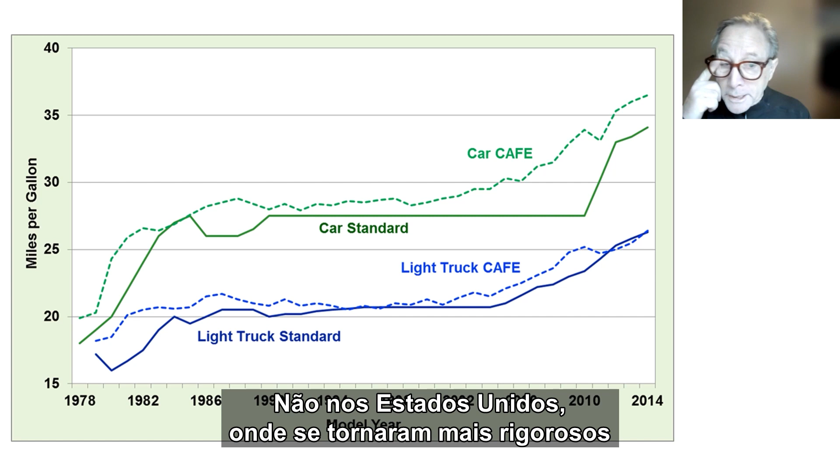In some places, it was the beginning of the bicycle revolution. Not in the United States, where they basically started tightening car regulations and car fuel consumption, beginning of tighter building codes and reducing demand for fuel.

Then supply-sider Ronald Reagan came along, smiled, cut a deal with the Saudis, and everybody started pumping again, and life was fine. Fracking made the energy problem better, but it made the carbon problem worse.

Energy conservation and efficiency became a hard sell when you had all kinds of new sources of gas, from the oil sands to the North Sea to deep sea drilling to Alaska pipelines. It was all about supply.

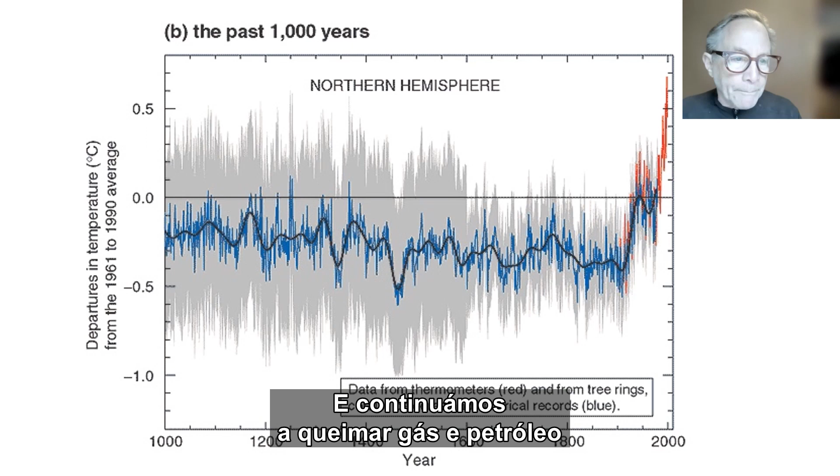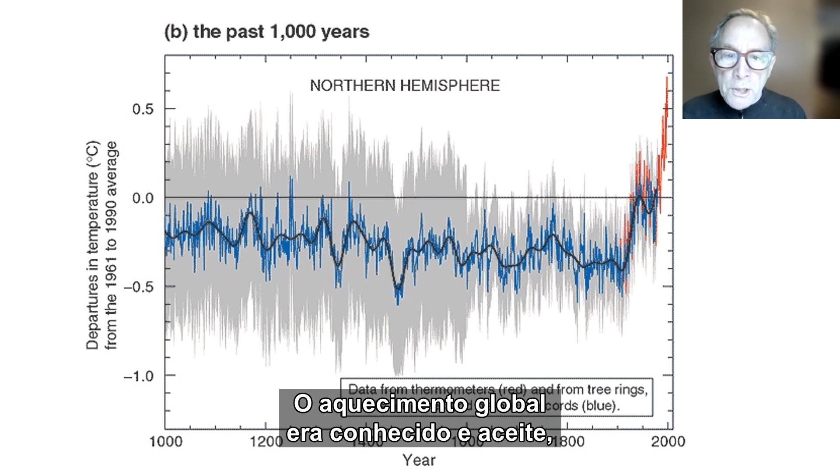And we kept burning more gas and oil, and the temperature kept rising. Solving the energy problem didn't do anything for the carbon problem. Global warming was common knowledge and accepted, but everybody was having such a good time burning all that oil and gas and didn't take it very seriously. And of course, it was all very political.

The Paris Agreement, after years of talk, finally set some limits on carbon emissions with a schedule, a carbon budget, and a target, a limit on warming to avoid catastrophe.

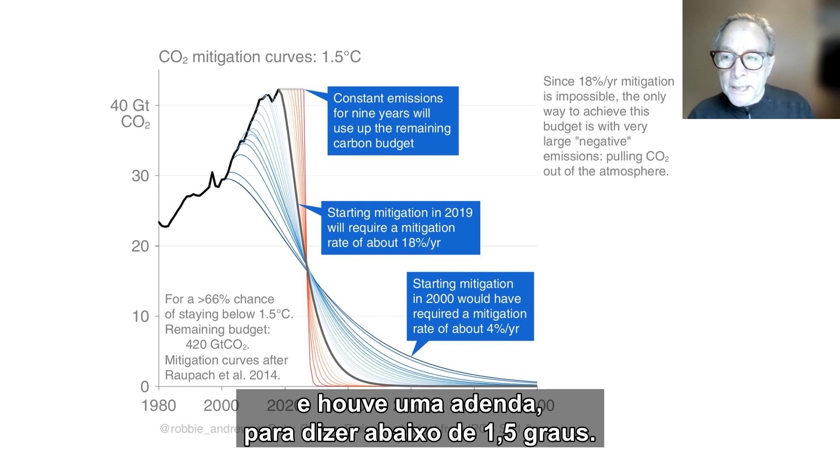According to the IPCC in 2015, they wanted to keep the temperature rise to 2 degrees. But in 2018, they figured that 2 degrees might be catastrophic, and there was an addendum to say below 1.5 degrees. And there's no ramp in reductions here. It's really a cliff. When this graph was done, the total remaining budget was only 420 gigatons.

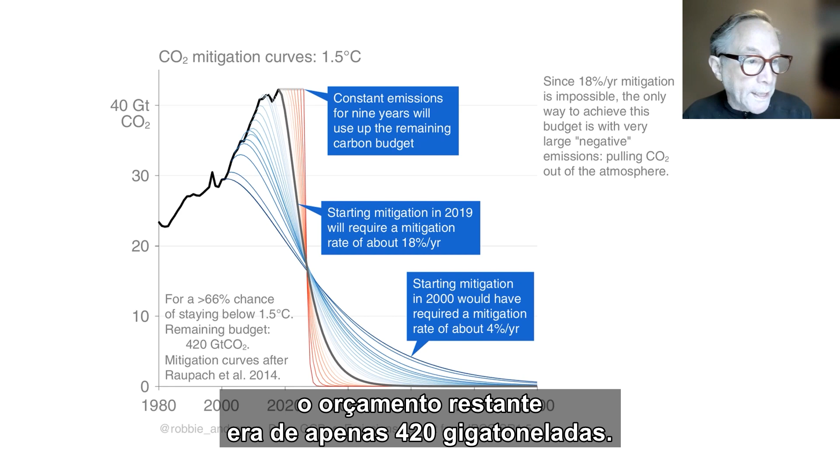And with all the talk and all the agreements and everything else, emissions kept rising, except for that little dip in the pandemic, and it's now rising again. And some have already given up altogether and have basically said we can't be saved, 1.5 degrees is out of reach.

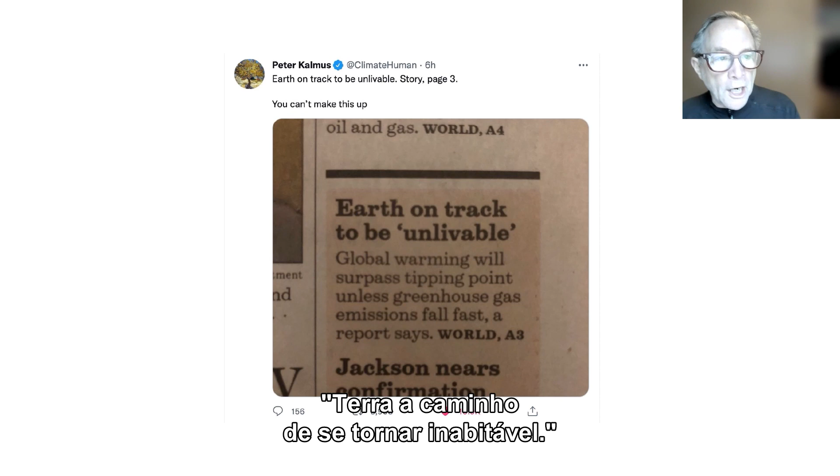Others don't. Last April, there was the third climate change report, the third section, I should say, that basically said what we have to do to mitigate climate change. And nobody paid attention to this. This thing dropped like a brick. You got things like this: Earth on track to be unlivable. Story on page 3. Didn't even make the front pages.

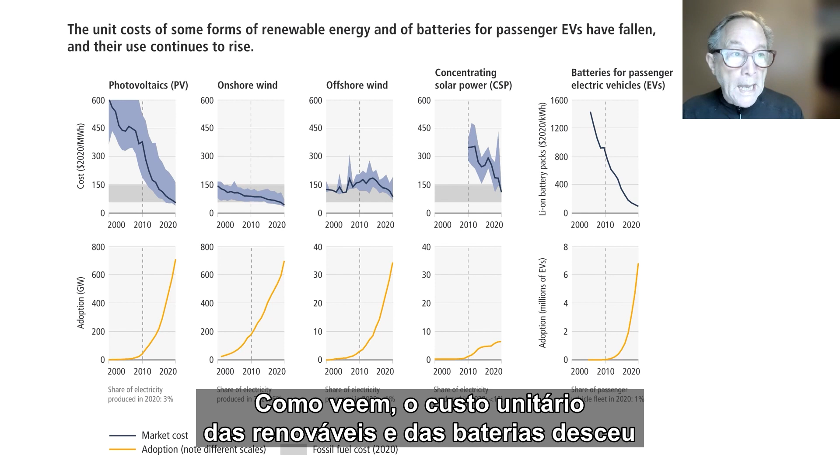But the content of it was in fact extremely positive. As you can see here, the unit costs of renewables and batteries have dropped and their use has dramatically increased. Renewables for 2021 dominate the additions to power.

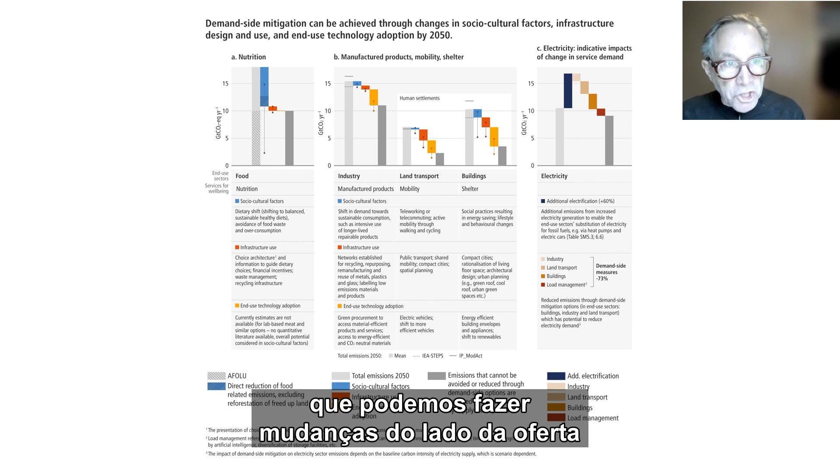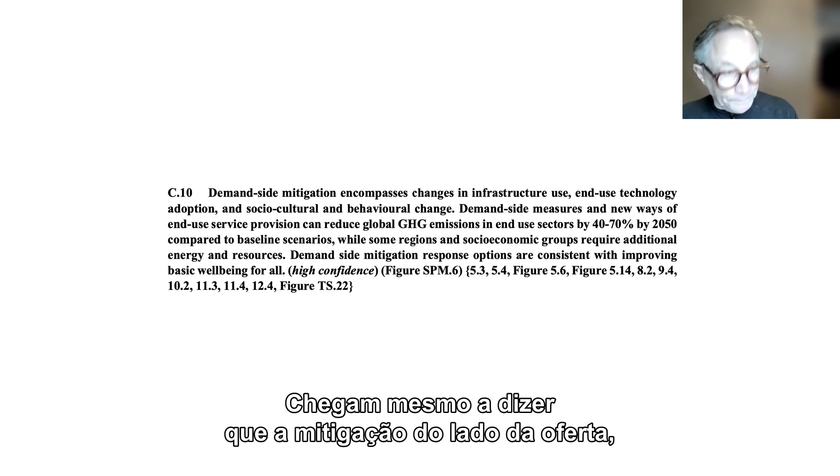And the IPCC report set out the fact that we could make changes, demand-side changes, to reduce our carbon emissions significantly in industry, in transportation, and buildings. They went so far as to say that demand-side mitigation, changes in infrastructure, technology, and behavior could reduce global greenhouse gas emissions by 40 to 70% by 2050.

As Amy Westervelt, a journalist, wrote it, the report made one thing abundantly clear: the technologies and the policies necessary to adequately address climate change exist, and the only real obstacles are politics and fossil fuel interests.

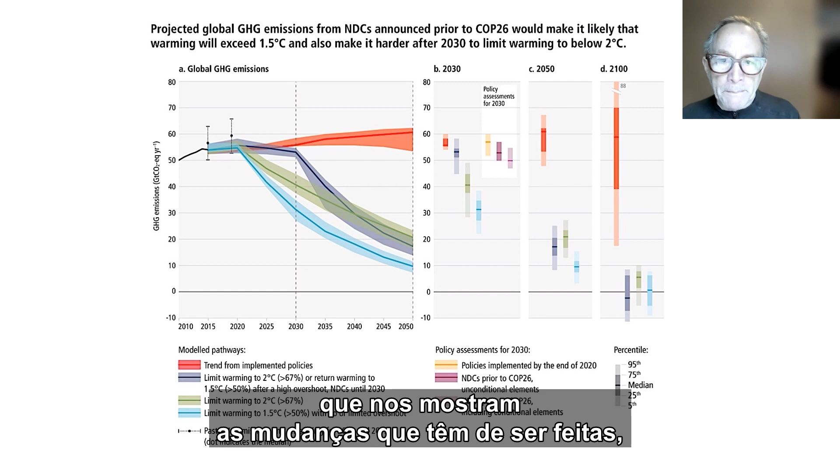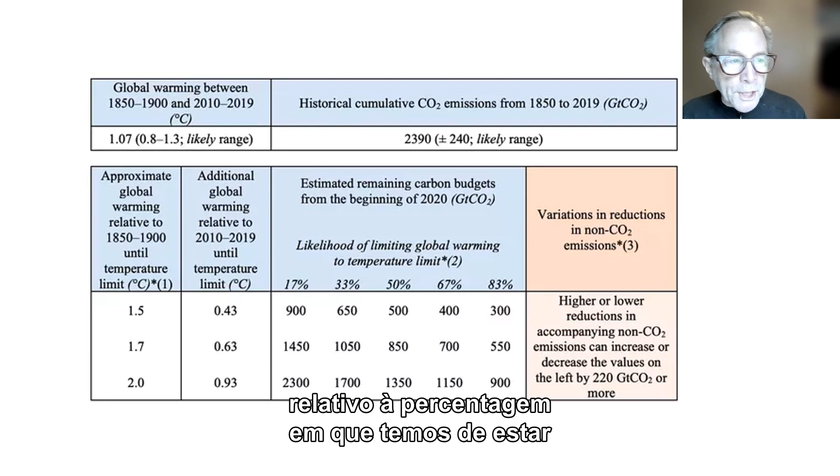So everybody keeps showing these graphs, these slopes of changes that have to be made, as we have to drop by. But in fact, it's much simpler than that. There's a ceiling, a budget, a number that they determined through their calculations, with what percentage do we have to stay under a certain temperature.

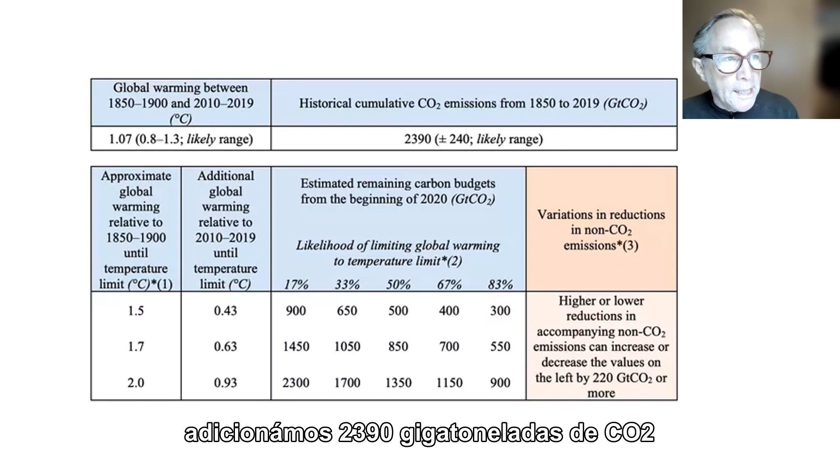So from 1850 until now, we've added 2,390 gigatons of CO2, and this is what we have left to stay under: 1.5 degrees at a 50% chance gives 500 gigatons, 2 degrees gives 1350. If we want bigger chances, it's a smaller number.

And here we are again. The last time the tanks were rolling through the desert, now they're rolling through the streets of Ukraine. And we've got a gas crisis.

They spent all this money to build this big pipe from Russia to Germany, and then they blew it up. So now we're in a situation where you can't get gas to Europe from Russia very easily, which has immediately caused huge problems of inflation in the UK, problems of supply that Germany is approving limits on heating and turning out the lights at night.

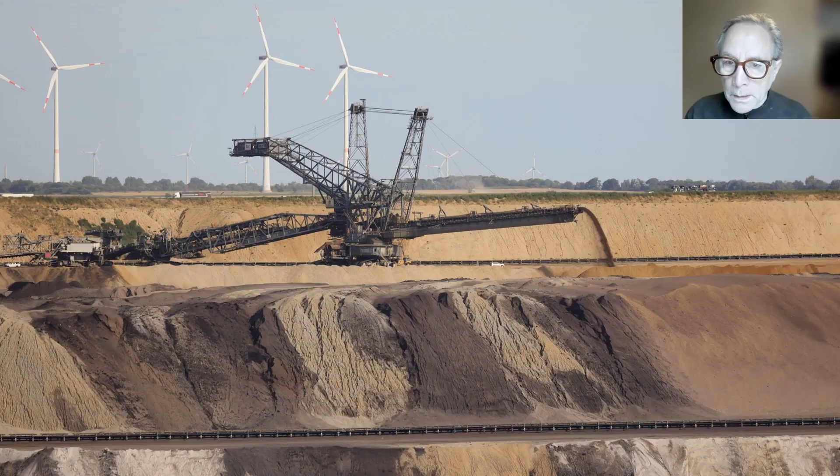And Portugal's inflation was the fastest rise in 30 years. Many people worry that carbon emissions will spike even higher because countries like Germany are digging more coal and opening coal plants, and Britain is looking at fracking.

Liquefied natural gas is being shipped in, and it has a much higher carbon footprint than regular natural gas, simply because of the refrigeration and the transport. Other people think that what will happen is another thing that happened in 1974.

As Michael Liebreich says, we're going to have the great clean energy acceleration. From now on, all three elements of the energy trilemma — security, affordability, and sustainability — are pushing in the same direction. The great energy price spike is going to give way to the great clean energy acceleration.

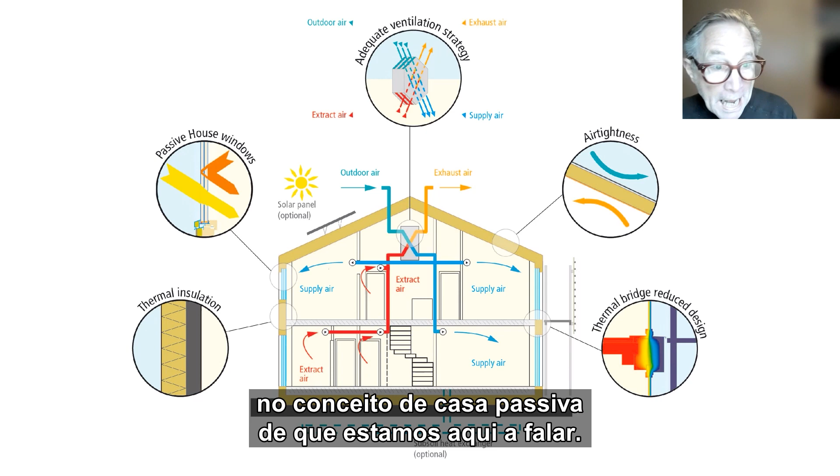Fatih Birol, head of the International Energy Agency, says the same thing: after winter comes spring. The oil shocks of the 1970s resulted in major progress in energy efficiency, nuclear power, solar, and wind. Today's crisis can have a similar impact and help speed up the shift to a cleaner and more secure energy future.

And energy efficiency is, of course, the key point in the Passivhaus concept that we're all here about. And the Passivhaus people make it very clear: energy efficiency is the first renewable energy.

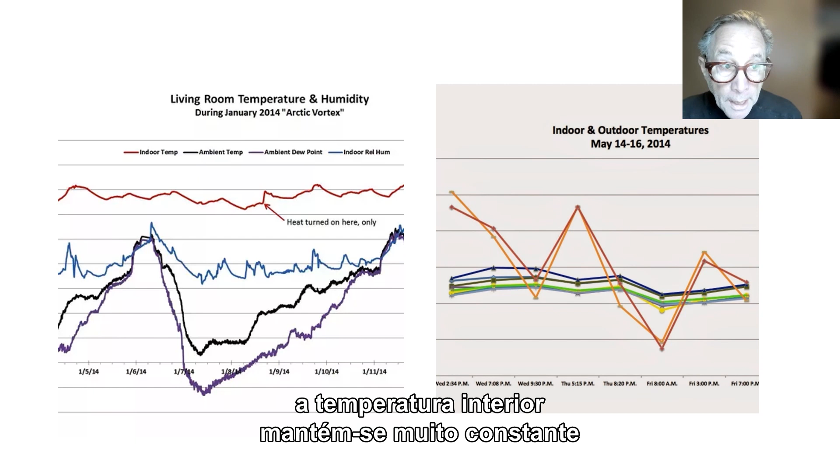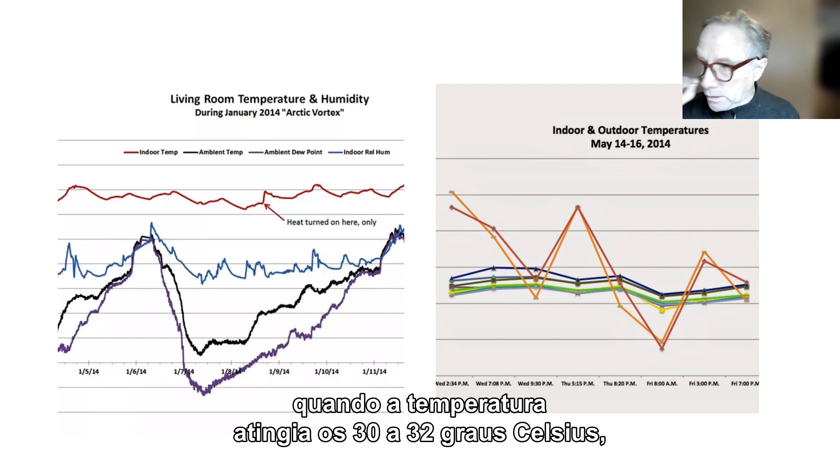And in California in 2014, going the other direction, where the temperature was getting up to 32 degrees Celsius, the temperature inside stayed cooler.

They also have that ventilation system, the filtered ventilation system, that basically brings in fresh air and doesn't recirculate air. This is very good, as they found in California in fires. When you have smoke and PM 2.5 in quantities, it can basically be filtered out. And that's why they're talking about Passivhaus being a good way to deal with wildfire smoke and indoor air quality.

Even for COVID, this is really helpful. You don't want to recirculate air.

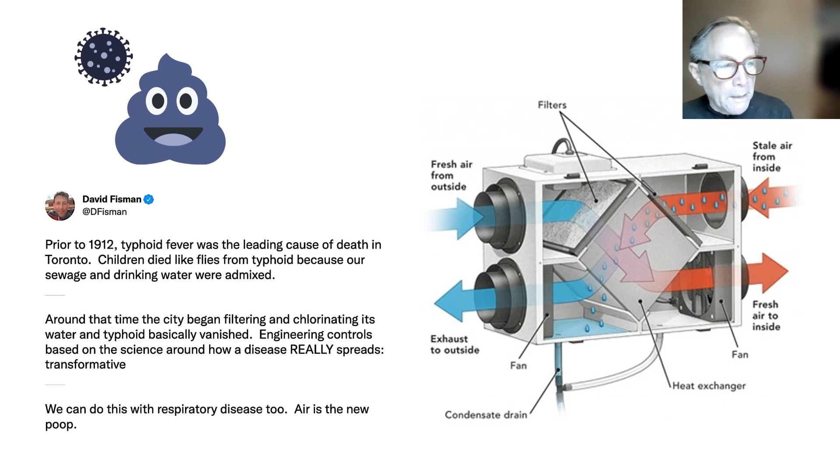We've never really talked about air in the way we do as water, but this doctor in Toronto has this great phrase: air is the new poop. Basically, we have to start thinking about air, designing for air, engineering for air, the way we do with water, and we've been doing with water for 100 years.

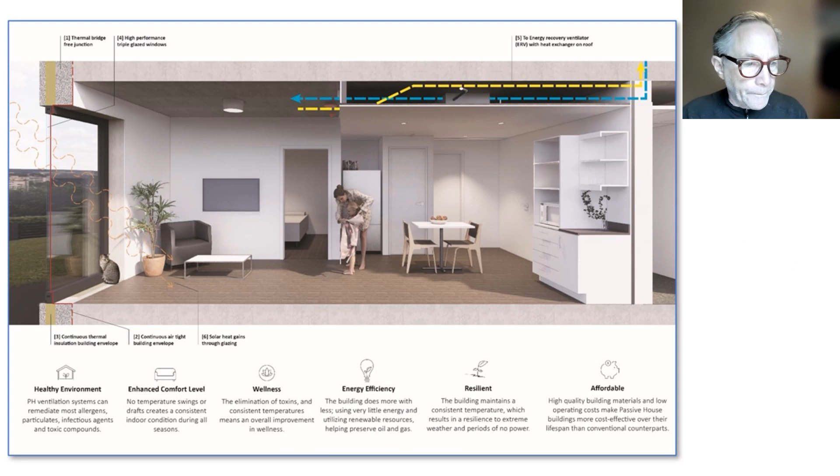So we know that Passive House will give you a healthy environment, enhanced comfort, wellness, elimination of toxins, of course energy efficiency, and resilience.

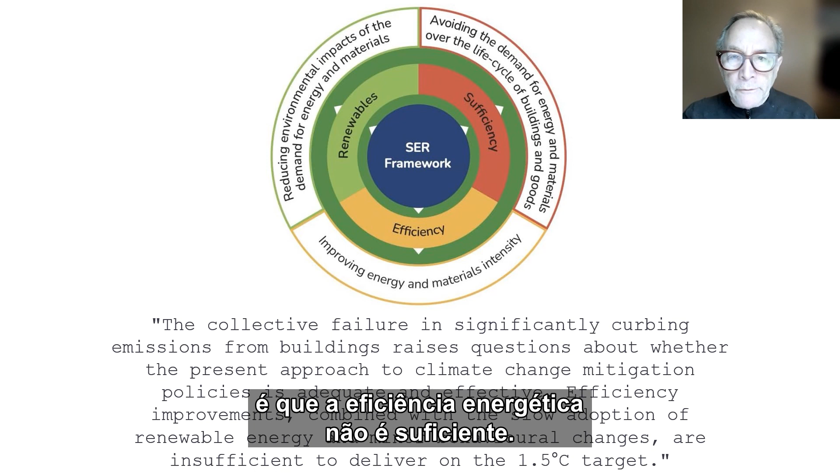However, a very important consideration, and the key of this presentation, is that energy efficiency is not enough. Yamina Saheb is an energy analyst and a lead author in the IPCC report that I was quoting earlier.

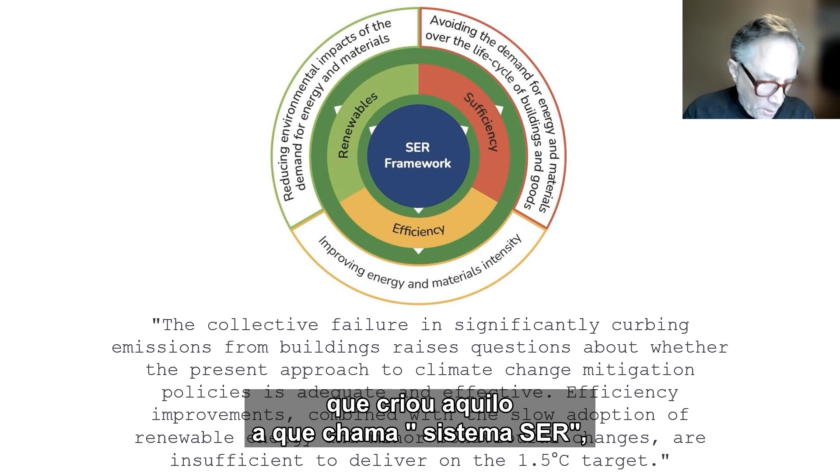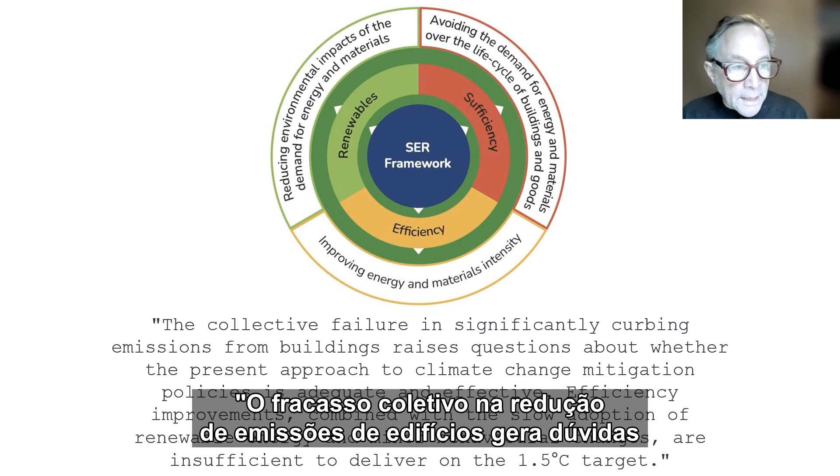She put together what she calls the SER framework — for sufficiency, efficiency, and renewables — and writes: the collective failure in significantly curbing emissions from buildings raises questions about whether the present approach to climate change mitigation policies is adequate and effective. Efficiency improvements, combined with the slow adoption of renewable energy and minor behavioral changes, are insufficient to deliver.

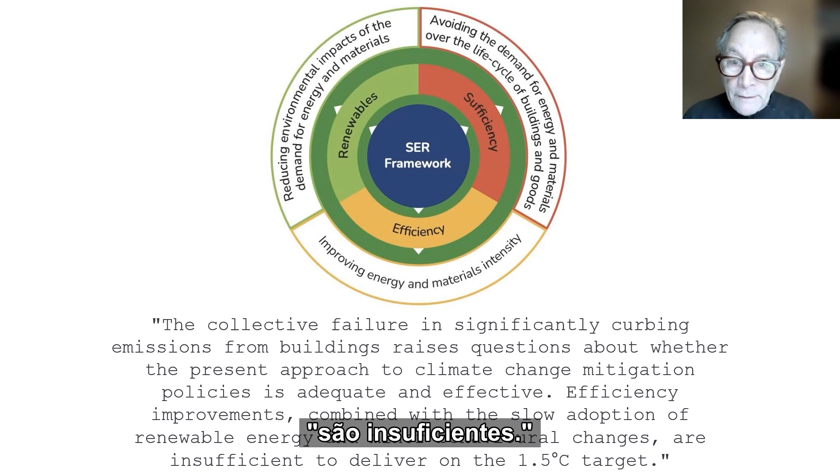Now, renewables is something that you've been dealing with here in Portugal — you've installed 57% renewable and installed more solar PV in the first half of 2022 than all of 2021.

But renewables are a pretty straightforward issue. Let's look at sufficiency.

This is my passion. I've talked about this before here, and I'm going to talk about it again just to remind you what it is. I think the best example of sufficiency is figuring out what is the most appropriate way to do something with the least amount of material and resources.

So, for instance, 100 years ago, everybody used a clothesline because that's all there was. Even the tenements of New York, everywhere, the clotheslines were hanging out.

Then they invented the electric dryer, and in the '50s in the United States, the clotheslines disappeared and everyone got electric dryers. But electric dryers have a real problem.

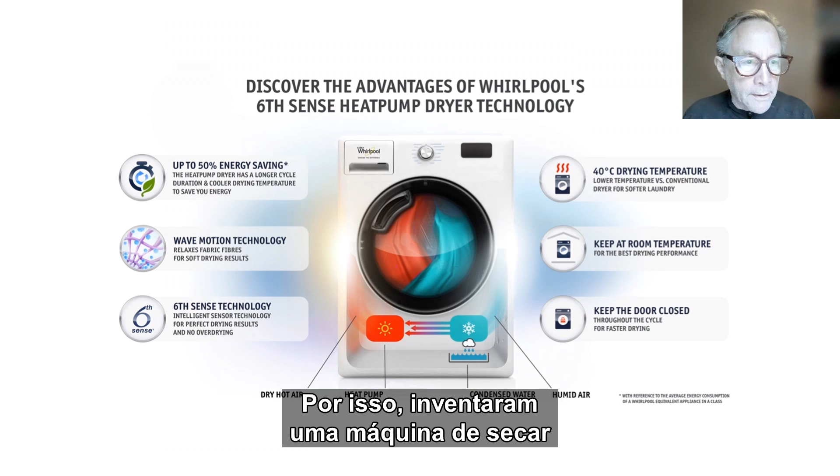They're like heating toaster coils and fans that just take air out of the house and throw it outside. They're expensive to operate just from the electricity and also for replacing all the air that they throw out the back of the house. So they invented this very fancy, expensive heat pump dryer that uses heat pump technology to be recirculating everything around the dryer inside, so it doesn't even have an outside vent. And they're complicated and they cost 3 times as much money.

But what do you do in Portugal that works perfectly well because you've got the climate for it? I took pictures of this all over Lisbon. People hang out their clothes to dry. And they do this all over China and everywhere else too, and actually believe that the clothes smell better and feel better than they do getting torn apart in an electric dryer.

The key message is efficiency is great, but efficiency without sufficiency is lost. It basically gets buried. Everybody knows we could produce and consume more efficiently than we do, but the problem is efficiency without sufficiency is lost. This is written by Samuel Alexander, an Australian expert on this. Despite decades of extraordinary technological advancement and huge efficiency improvements, we keep using more energy.

Demand keeps increasing. There's another thing also that's called Jevons paradox. In the 70s, when there was the oil crisis that we've talked about, all the car manufacturers started developing small cars, like the Pinto in the States, a terrible car, but they were responding to the market. My mom had this, a little Toyota Echo that I drove until it completely died about 2 years ago. But what everybody is buying in the United States are these giant pickups.

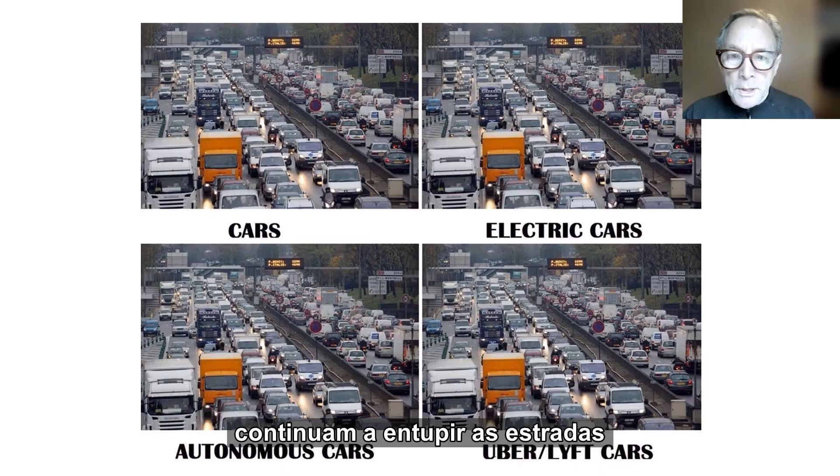70% of the car market now are all of these pickup trucks, which is a huge problem because, of course, they're more efficient, but they still have so much metal in them. And the problem with all of these things, like big cars, electric cars aren't really that different. People still park them on the sidewalks. They still clog the roads. And yet America is obsessed with the car, and it's going to smother us in CO2, whether it's electrical or not.

The sufficient way to go, of course, would be to be like Stockholm in 1928, where everybody's on a bicycle. We have to look at everything we do and how we do it and pick the methods with the lowest requirement to run it and the lowest embodied energy. That's why I ride an e-bike, a Dutch e-bike, and never drive. And people say, oh, you can't do this in Canada, it's too cold. But you just dress properly and you're fine. And I do this, and I'm just fine in the coldest weather.

Now, again, the problem is we've got this American dream, this North American dream of the big house and the big car towing the big boat. And that was the dream in 1960. And the only difference in the dream today is the house is bigger, the boat is bigger, and the car is way bigger. It's now a truck. Their houses, in the 50s, the dream was to get a house, and they weren't that big. They were lovely little things.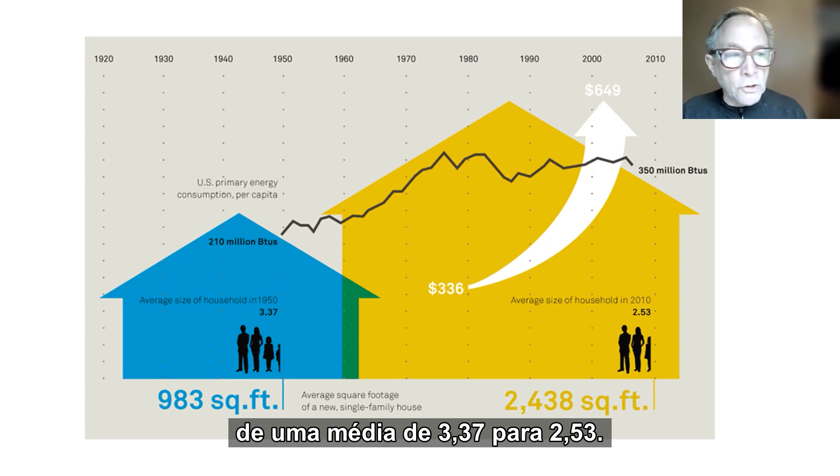And the dream now is sort of this Elon Musk all-electric house with solar shingles, solar power, a Powerwall battery in the wall, 2 Teslas in the garage. But it's big and it's expensive, and again, it takes so much to build it. Houses in the United States went from 983 square feet to 2,400 square feet, while the number of people in them went down from an average of 3.37 to 2.53, and the number of BTUs to heat it doubled.

Sorry for all of the imperial measurements there. I'll give you some Portuguese numbers here about inflation and the cost of building going up and materials going through the roof, which is another reason why we have to reconsider how we build and how big we build.

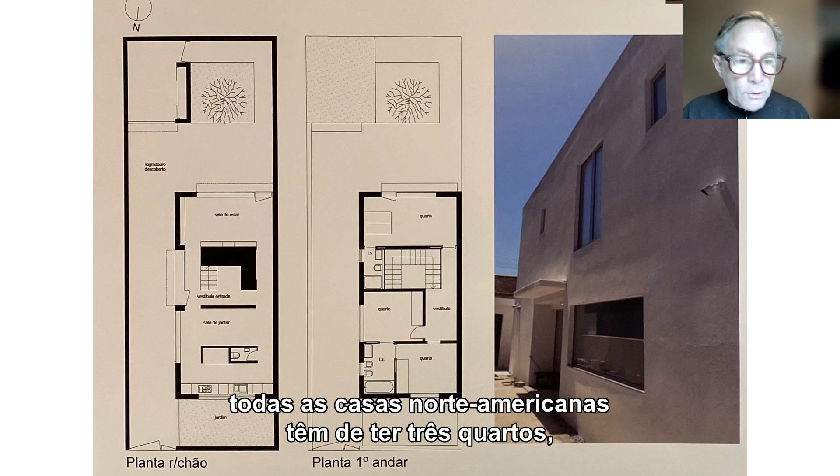I was so impressed when I was last here with Marcio Calera's house, a great example of how you build simple and small and passive house. I keep looking at this plan. It's 107 square meters, and yet every North American house has to have 3 bedrooms and 2 baths and a powder room, and this even has what I love, which is a separate kitchen, all in barely 1,100 square feet, 107 square meters, half the area of a traditional house with everything you want in it.

And now I want to talk about why this issue is so important for architecture. Architecture, yes, but for everything.

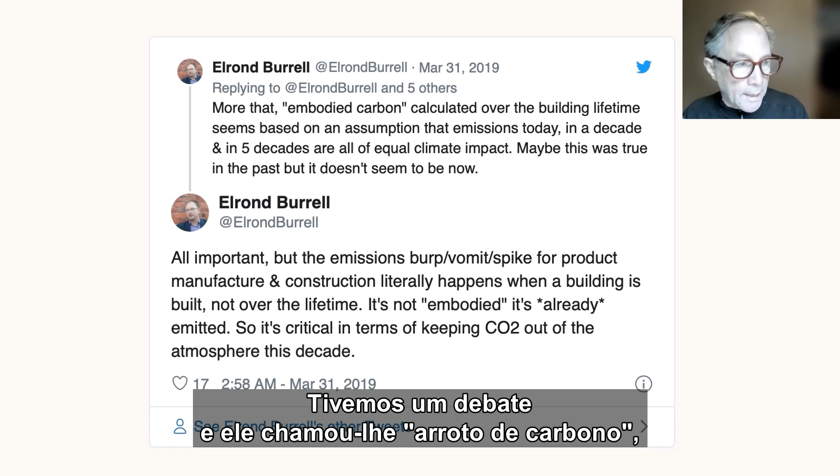So it's been called, most people have heard the term embedded or embodied carbon. It used to be called embodied energy, and that made some sense because the energy went into making something. But when we started worrying about carbon instead of energy, embodied carbon made no sense because it's in the air, it's not embodied in the device. Elrond Burrell, who's also spoken here, he and I had this debate, and he called it the carbon burp, the carbon vomit, the carbon spike. But it's emitted, so we have to find a better name.

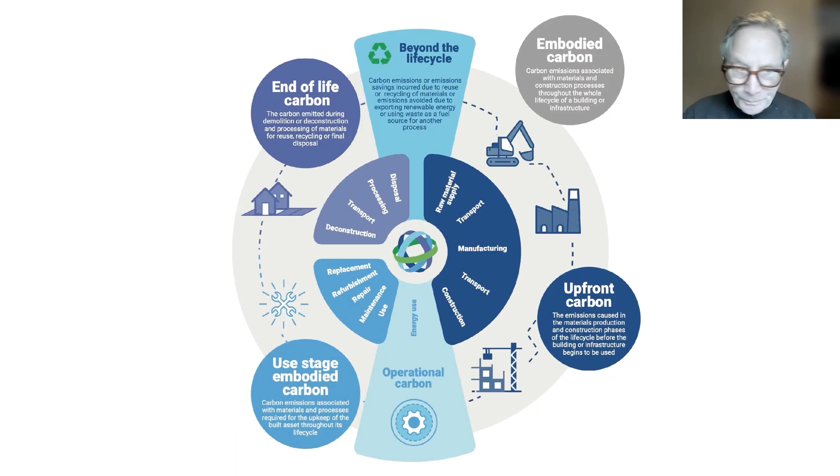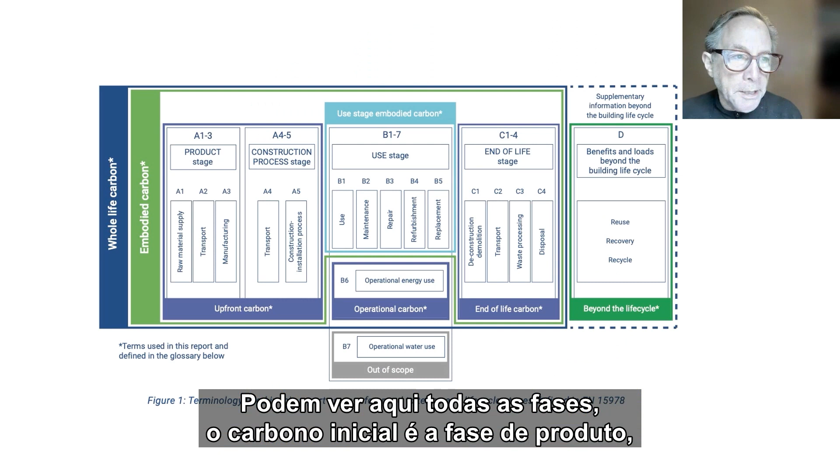So, upfront carbon, as I call it, they got more sophisticated about it, and they consider it one portion of the full embodied carbon. You see all the stages here, that upfront carbon is the product stage: the raw materials, transport, manufacturing, and the construction.

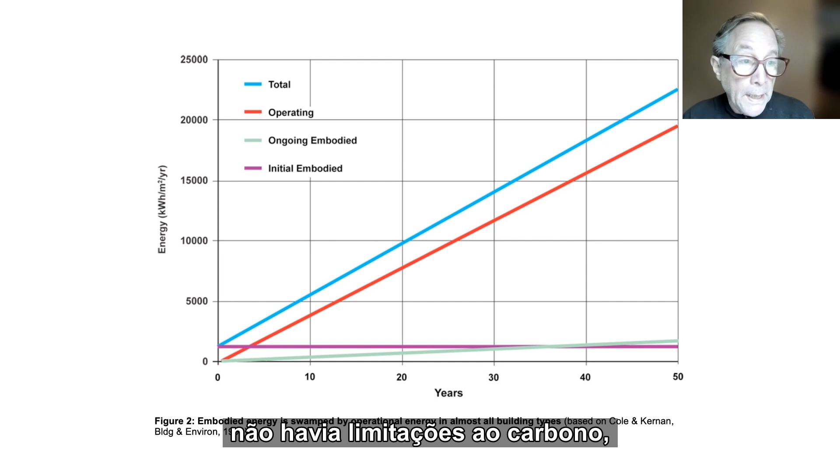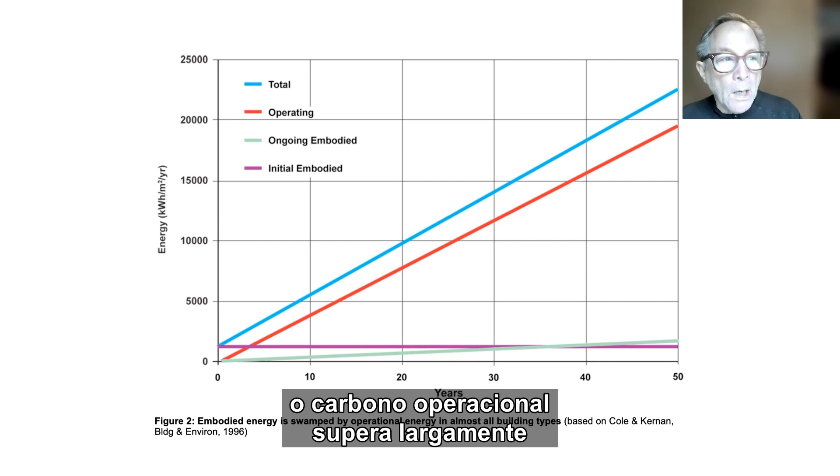And nobody used to care about embodied carbon or embodied energy, as it's called here, because electricity was coming from coal. It was dirty and put out carbon. Buildings weren't that well insulated. Back in 1996, you can see in this drawing that basically the operating carbon overwhelms the initial embodied energy almost immediately, in a couple of years.

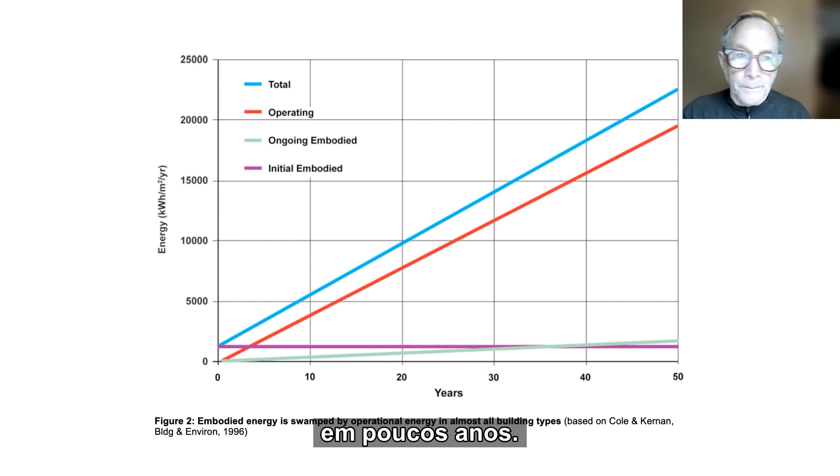John Straube, one of the best engineers, wrote back in 2010 that the ongoing consumption of energy to operate, condition, and light a building is the largest single source of environmental damage. Basically, studies show that energy used in operation and maintenance dwarfs the so-called embodied energy of the materials, saying that 83 to 94% of the 50-year life cycle was operating.

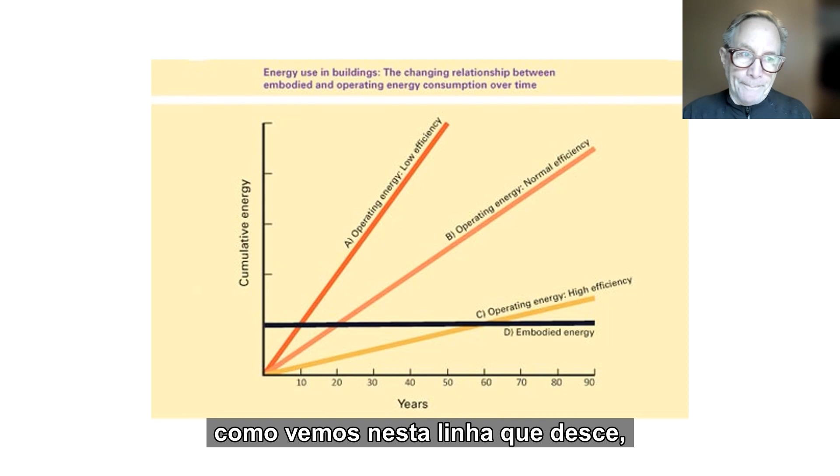But a funny thing happens when you start making buildings more efficient: it takes longer and longer for the operating energy to overwhelm the embodied energy. You can see that line going down as buildings get more efficient.

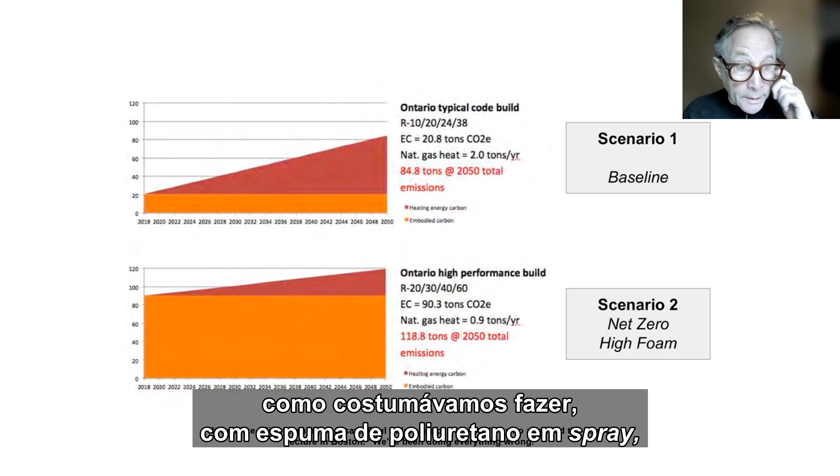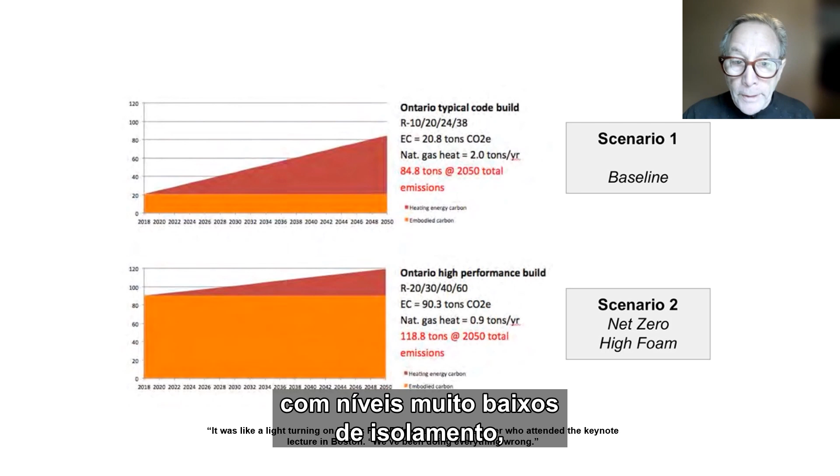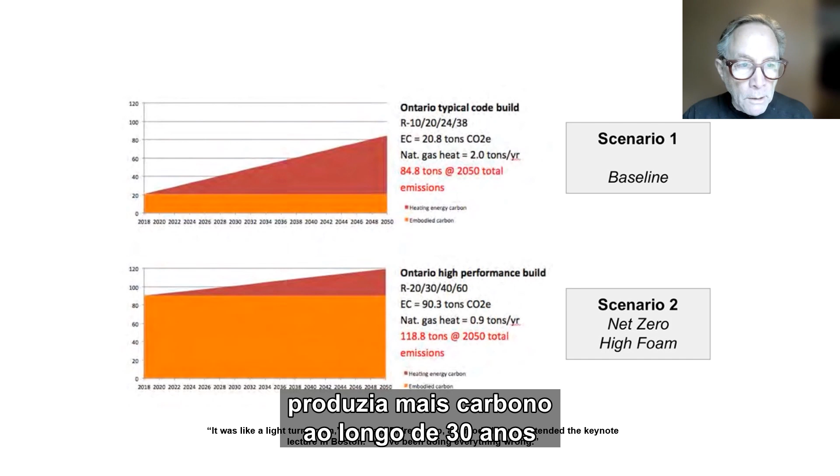And this was a shocker. It was like a light turning on, said one builder. We've been doing everything wrong.

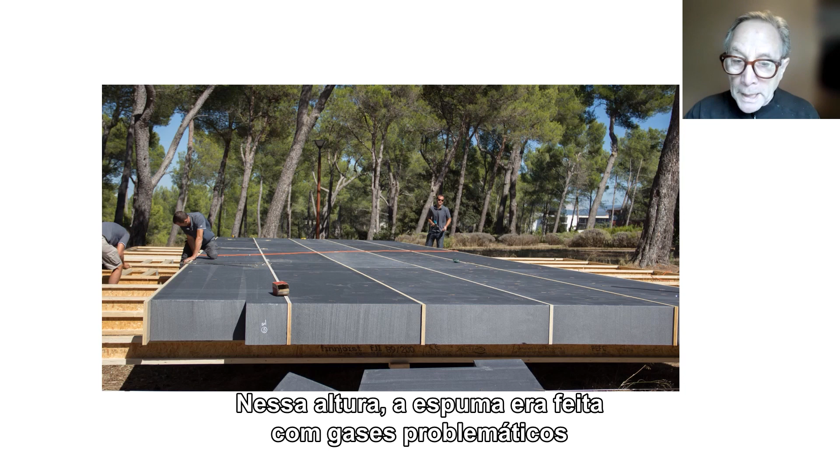There's this hilarious passive house that was built, I think, about 7 years ago, where the thing was essentially solid foam. Now, foam at that time was made with propellants that were clear greenhouse gas problems. So here you've got a passive house built with solid foam, and everybody thought it was great because nobody was thinking about this issue of the upfront carbon, the greenhouse gases.

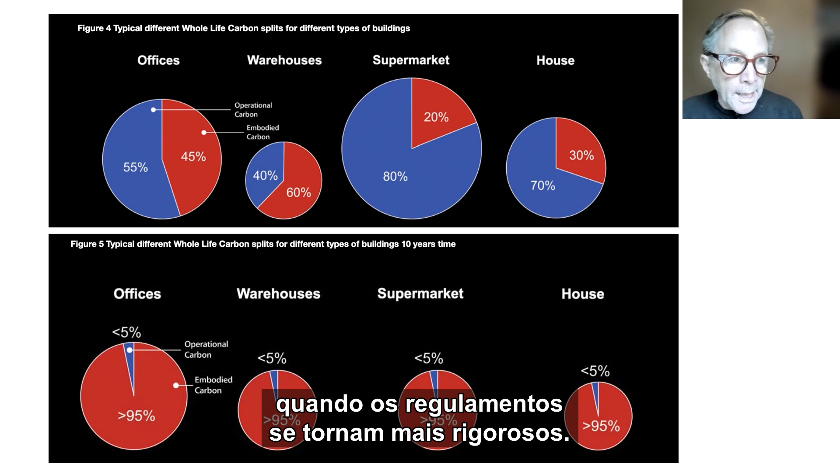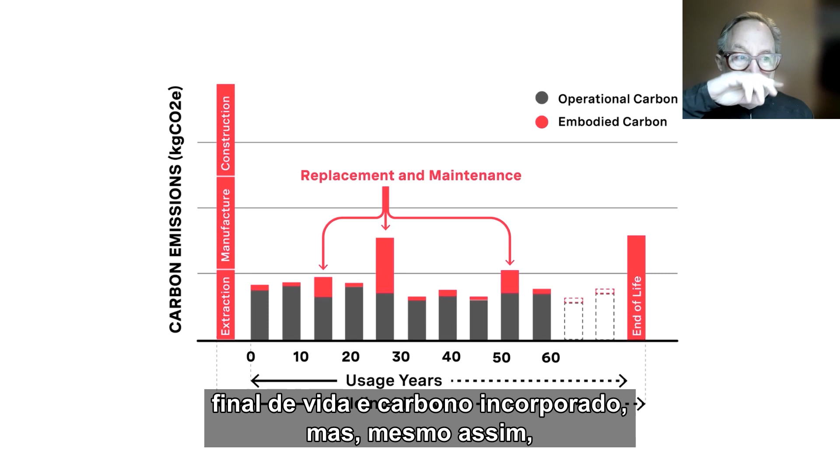Now people are. This was a big study done by Architects Climate Action Network in the UK that looks at what happens when codes start getting tightened. Right now a building, an office building, might be 55% operating carbon and 45% embodied. But if you take the same building in 10 years, with the projected cleaning up of the grid to be more renewable energy, electrification, and better insulation, suddenly it's 95%. They included replacement, maintenance, and end of life in embodied carbon, but it was still bigger than the operational, and the grid is getting cleaner all the time.

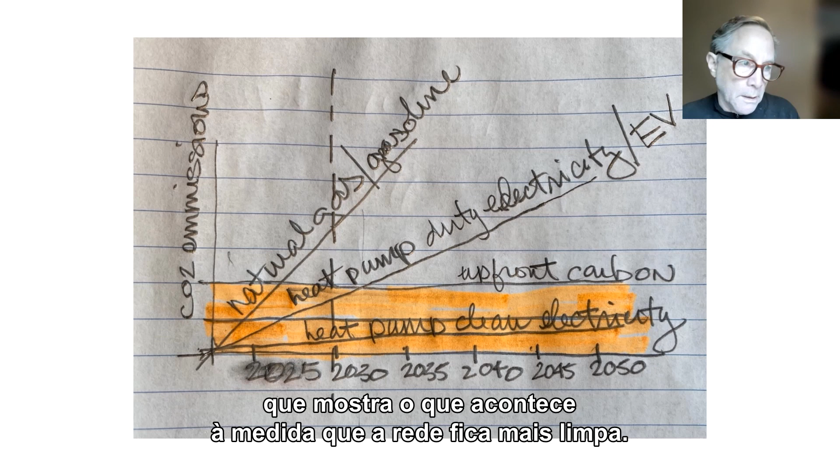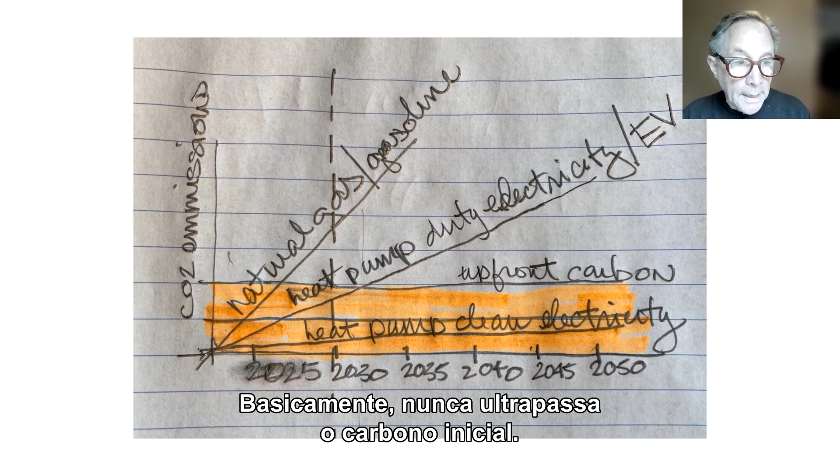Forgive my terrible sketching here, but I made my own graph looking at what happens as the grid gets cleaner. Where I live, for instance, the grid is 94% clean, hydro and nuclear, so it basically never gets above the upfront carbon. If you've got a heat pump system running on clean electricity, it's basically all embodied carbon, or as I call it, upfront carbon.

And so I came up with what I call the ironclad rule of carbon, which is: as our buildings become more efficient and we decarbonize the electrical supply, emissions from upfront or embodied carbon will increasingly dominate and will approach 100% of emissions.

Remember, this shows that your buildings are basically all embodied or upfront carbon. And it's not just buildings, it's also cars. Everybody thinks they're going to buy electric vehicles and build all these electric Fords, but everybody forgets about the upfront carbon.

There was this great poster Hyundai put up: why shouldn't a car have the same emissions as a bike? And the graffiti from someone who knows their energy said, because of the carbon embodied in the materials.

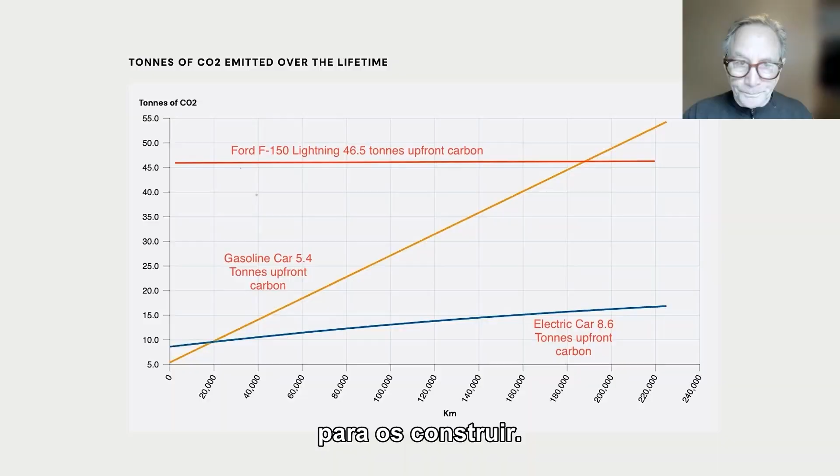When I did the math on this, I found that the Ford electric pickup truck at the time was going to have a bigger carbon footprint than a small European gas car. Everybody's sitting there saying electric cars are so wonderful, we're going to invest in them, but not when you start thinking about what it takes to build them. The carbon footprint might be so high it's off the scale compared to even a little gasoline car. Here it says 180,000 kilometers until it takes over.

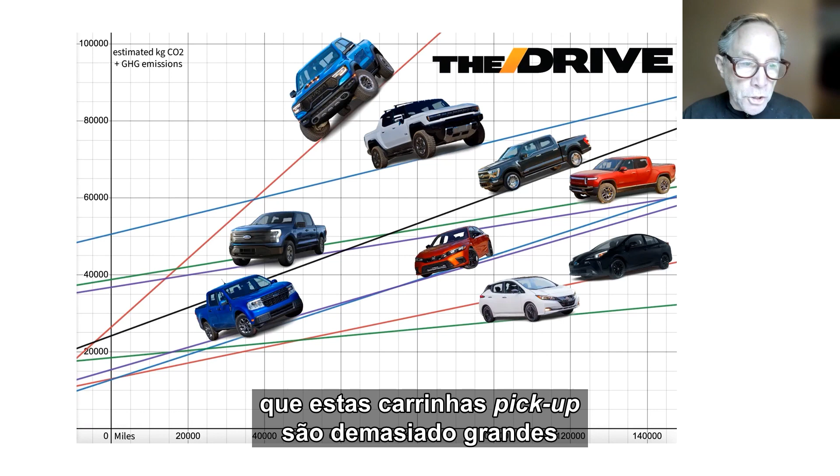This was done by another group that came to basically the same conclusion, that these pickup trucks are just too big and that electrification doesn't solve the problem.

But when you look at the small print, they say 83% of it is production and only 13% is use. That's based on the average American electrical supply, which is a lot of coal. Where I live in Ontario, that phone is not 83% production because there's no carbon from the use—so it's all 100% upfront carbon.

It's the same for my watch, which I obviously couldn't lift my wrist if it actually weighed 38 kilograms. It's all embodied carbon.

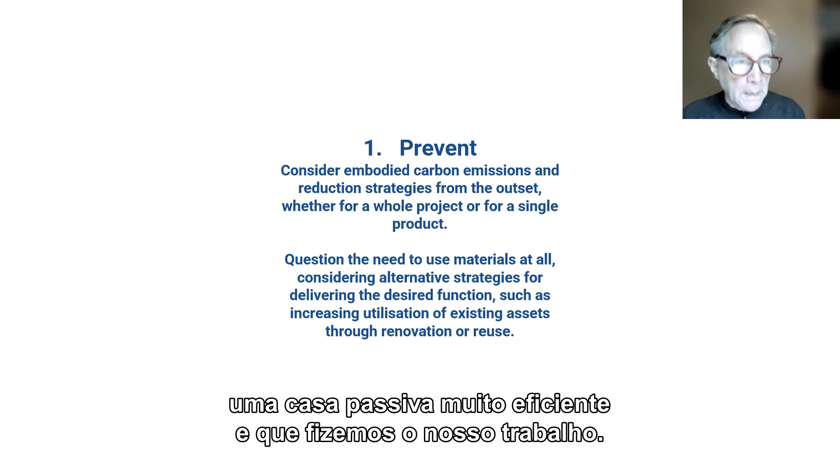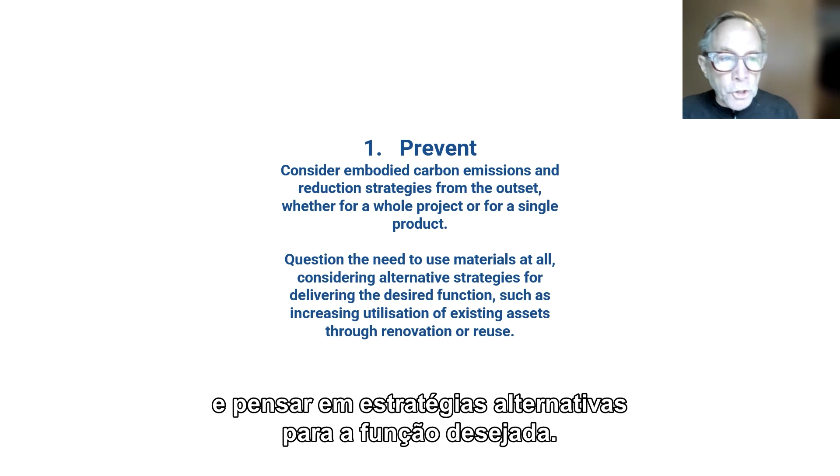So what we have to do, as the British showed in that World Green Building Council report, is recognize we can't just say we've built a really efficient passive house and done our job. We have to consider the upfront and embodied carbon emissions and reduce them at the outset. We have to question whether we need to use materials at all, and consider alternative strategies for the desired function.

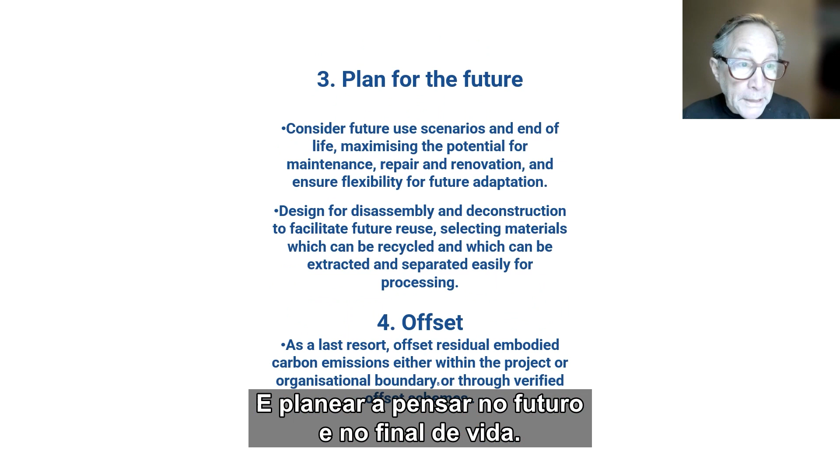We have to reduce and optimize, use low-carbon design guidance—there's now that pH ribbon tool you can use—apply design approaches that minimize the quantity of new material required, prioritize materials that are low or zero carbon, and plan for the future end of life.

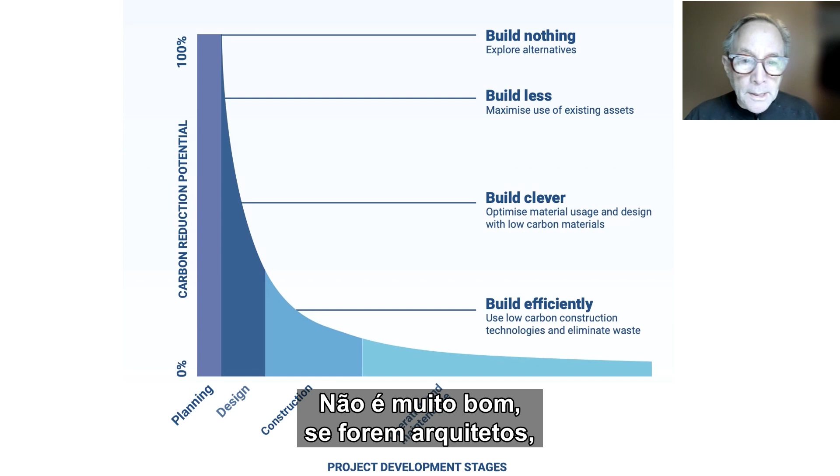Or, as it's all put into a chart: the first thing we should do is build nothing and explore alternatives. Not very good if you're an architect—but it helps that you want to build. Build less, make use of what we've got by renovating. Build clever by optimizing it. And obviously, build efficiently using low carbon and eliminate waste.

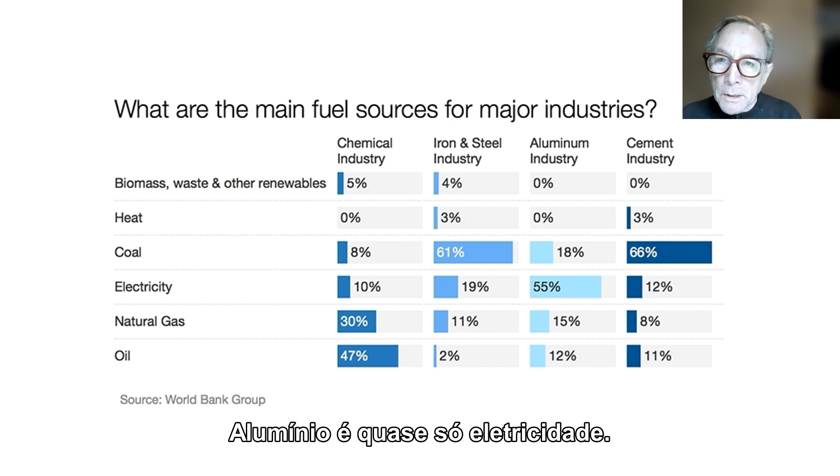We have to think about the materials we build with and look at where the energy comes from. In cement, it's almost all coal. Iron and steel is almost all coal. Aluminum is almost all electricity. This is chemistry, and it's a real problem—the way you make steel is you throw carbon into the iron oxide, the hematite, and the carbon reacts with the oxygen, leaving you with steel and carbon dioxide.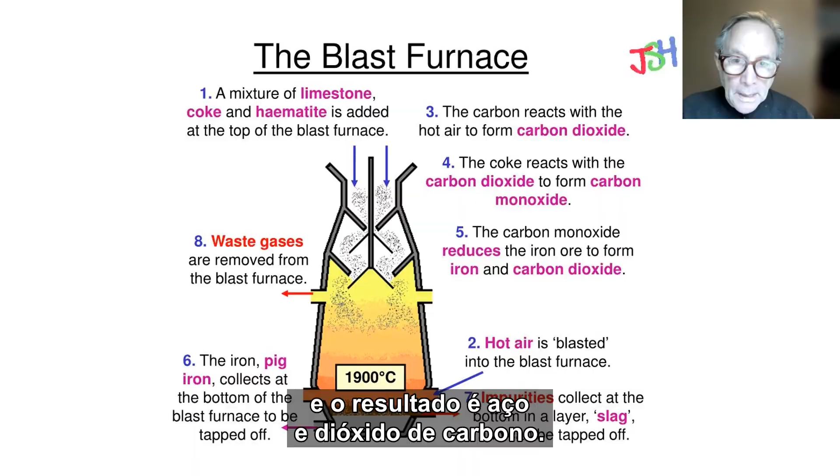There's new technology that can use hydrogen instead of carbon, giving you water instead of CO2. But to decarbonize the whole global steel industry would require 600 gigawatts and 52 million tons of green hydrogen, which doesn't possibly exist.

It's the same with cement. It's a chemistry problem—to turn limestone into cement, you basically get carbon dioxide as the byproduct. 50% of its footprint comes from the chemical reaction.

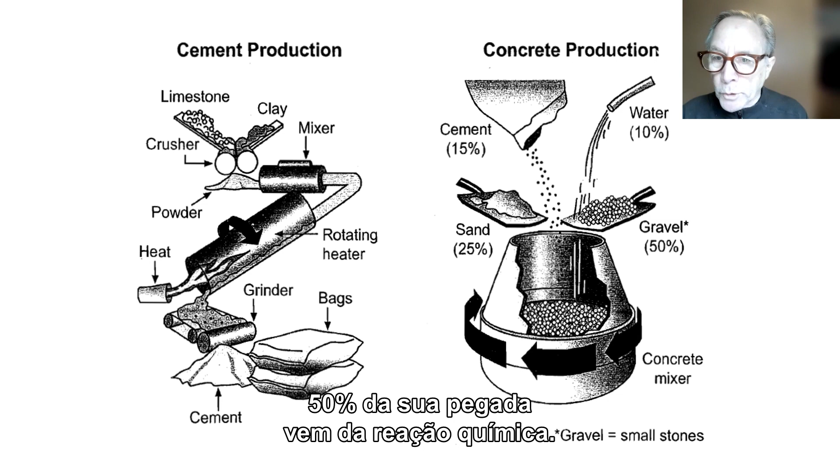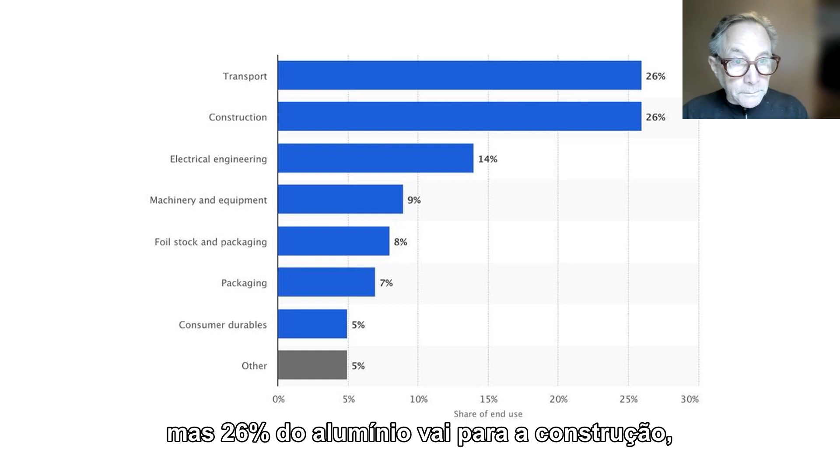Aluminum—everybody loves the idea of it because it's totally recyclable. But 26% of aluminum goes into construction and 26% goes into these stupid pickup trucks, and everybody thinks it's all so green and wonderful. This building was on Dezeen last week, entirely made out of aluminum—isn't this great because it's recyclable? But there isn't enough; the use of aluminum grows all the time.

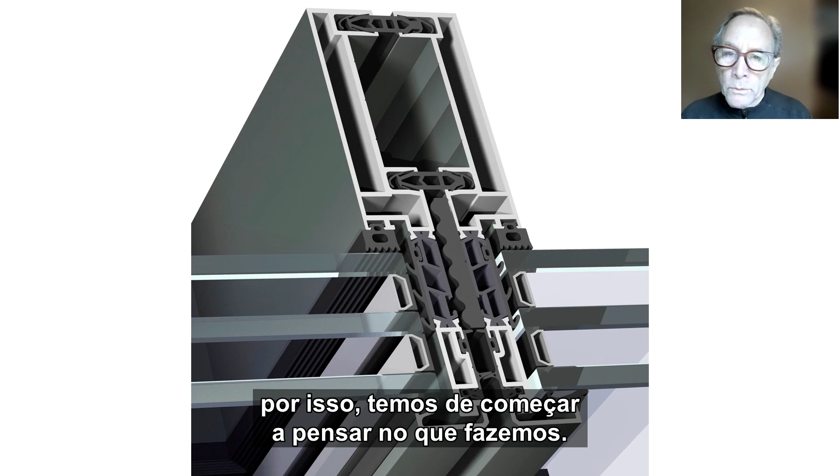It doesn't all get picked up—a lot goes to the dump. So we have to start thinking about what we do. Again, this is the same thing: it's chemistry.

Aluminum oxide, alumina - you put a lot of electricity into it, and that breaks the bond, which releases the oxygen from the aluminum. But where does the oxygen go? It combines with carbon and comes off as carbon dioxide.

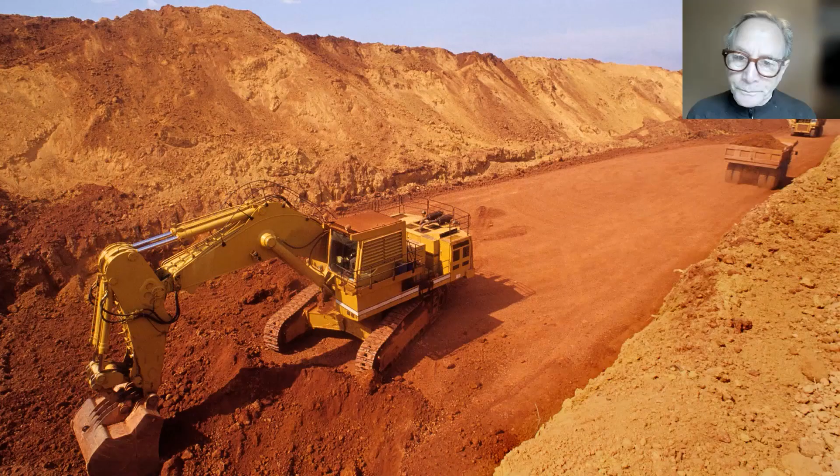Now, these guys - Justin Trudeau took some money from Tim Cook of Apple, and everybody's investing in this Elysis aluminum, which uses a different kind of anode so that it isn't a carbon dioxide reaction. And this is being done also in Russia, the biggest source of green aluminum is Russia. And guess what? The war is coming in and messing that up completely, as they're talking about banning Russian aluminum, which is the greenest aluminum we have.

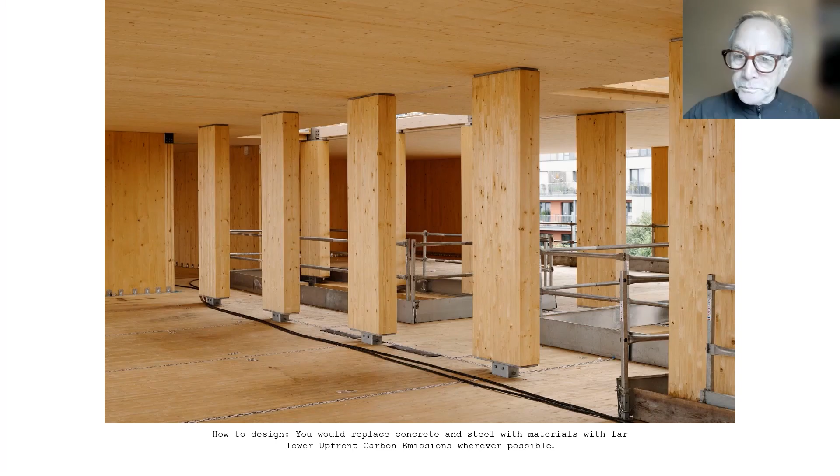And even green aluminum is a huge problem because of bauxite mining. It's destructive and terrible, and it leaves behind these lakes of red mud after they take out the aluminum. So what do we do? Well, there's the issue of whether we can start using more wood. But we know that's problematic from the forests that we have. How much wood can we actually get? How fast does it grow back?

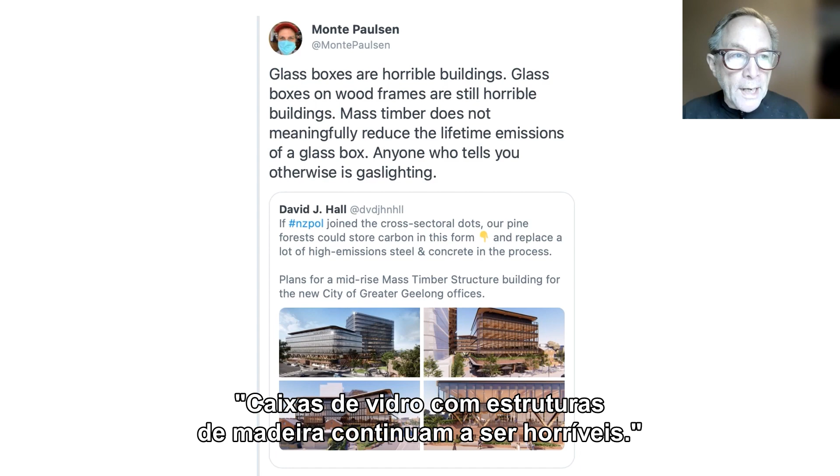And we're still building stupid buildings, even with wood, because people like looking up and seeing the wood. As Monte Paulsen, Passive House expert, says, glass boxes are horrible buildings. Glass boxes on wood frames are still horrible buildings. Wood frame buildings on massive, massive parking garages, on these carbon icebergs below our buildings, are horrible buildings. And people just don't really get this whole picture.

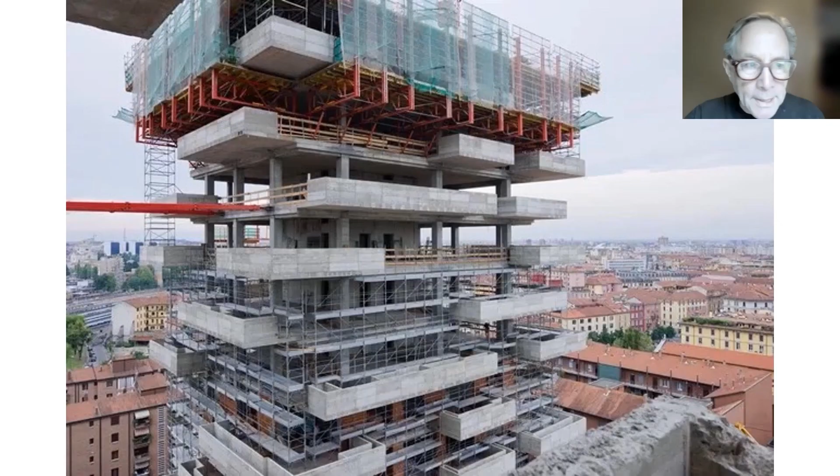And the concrete footprint to hold up those trees, the upfront carbon that goes into making this building, it'll take decades for those trees to suck that up. And the Valcucine kitchen is made of glass. So when you think of these things in terms of upfront carbon, when you've got a glass kitchen instead of, say, a wood kitchen, in a building that's got like 50% more carbon than it otherwise had - none of this is green and none of this is sustainable.

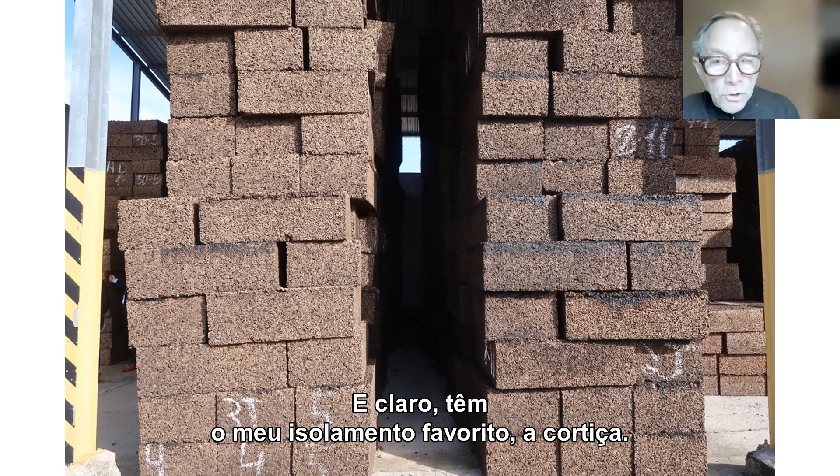And of course, you have my favorite insulation, which is cork. And you can do all kinds of wonderful things with cork.

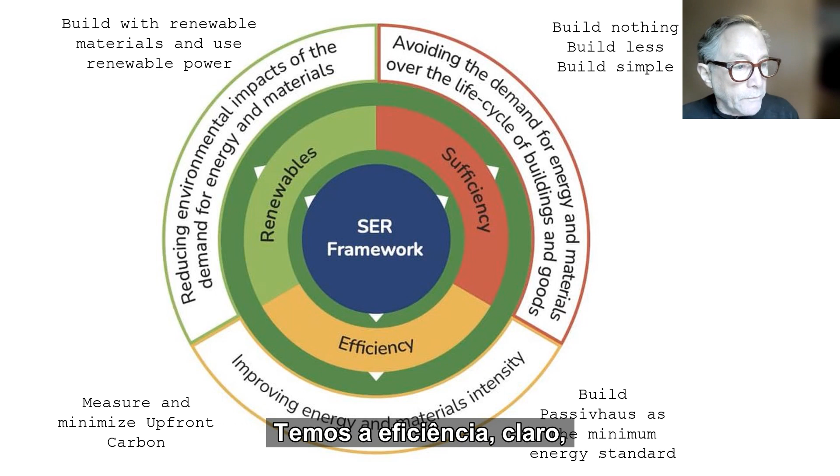So here we are again at the SER framework, and I think this is the thing that we will end with. We've got to, of course, focus on efficiency - you build Passivhaus as the minimum energy standard. Then we've got to also go for improving the energy, the upfront carbon, so we have to measure and minimize it. We have to obviously build with renewable materials and use renewable power.

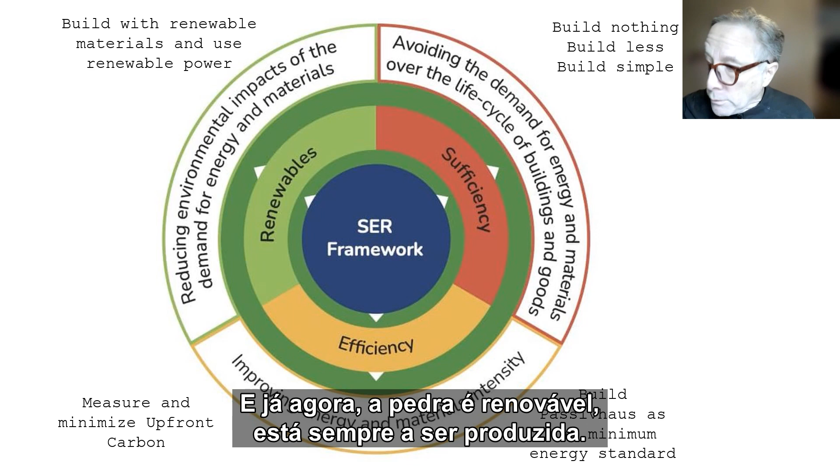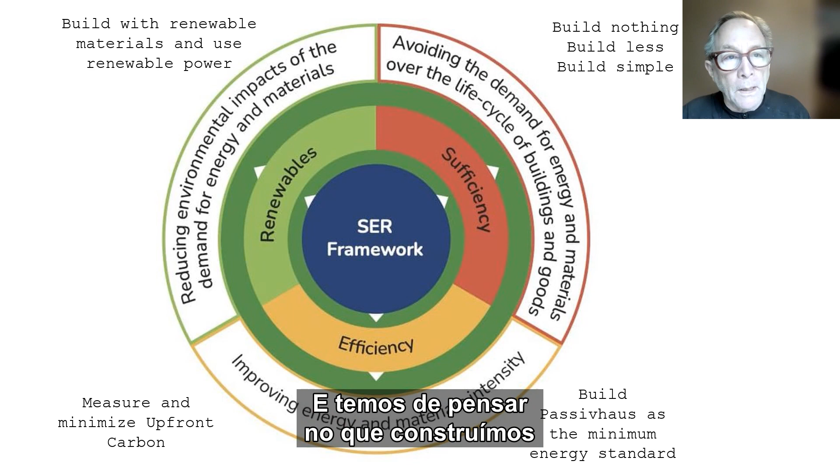And by the way, stone is renewable - we're making more of it all the time. It takes millions of years, but that's what happens with plate tectonics. Very slow, but renewable. And we have to think about what we build on the sufficiency side: build nothing, build less, and build simple. Thank you very much.